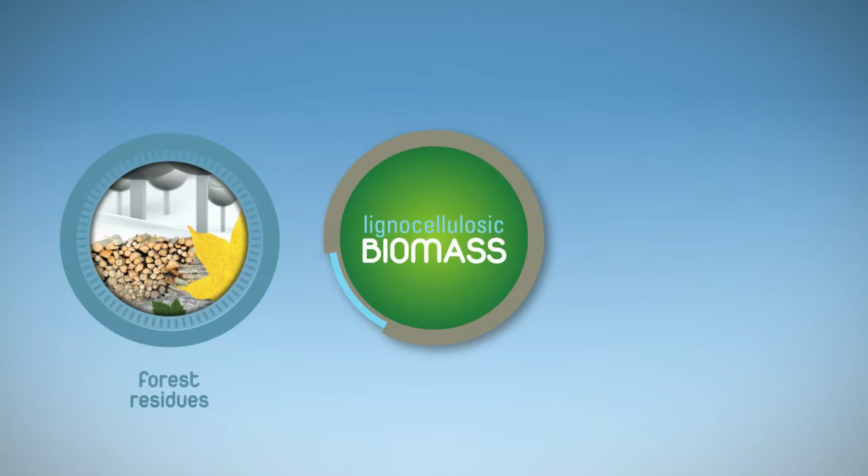These biofuels, which are intended for automobiles and aeronautics, come from the transformation of lignocellulosic biomass, such as forestry byproducts, straw, or dedicated cultures. For their development, the BioTFuel partners will validate the technical and economic feasibility of innovative production technologies in 2 pilot plants.

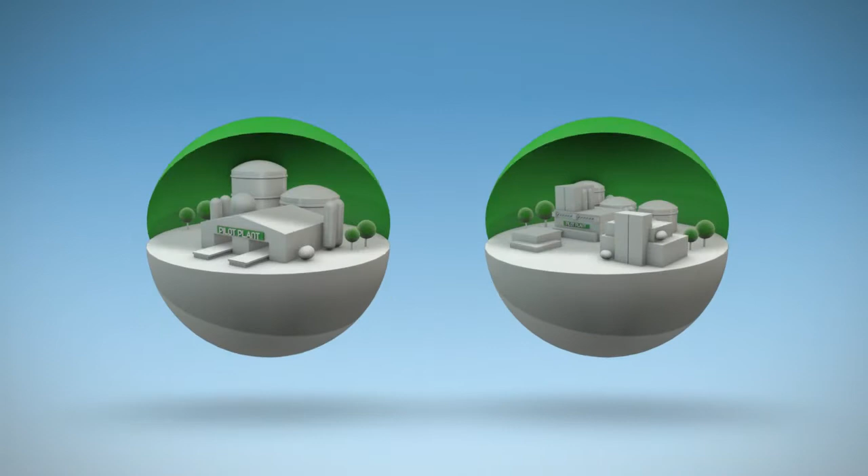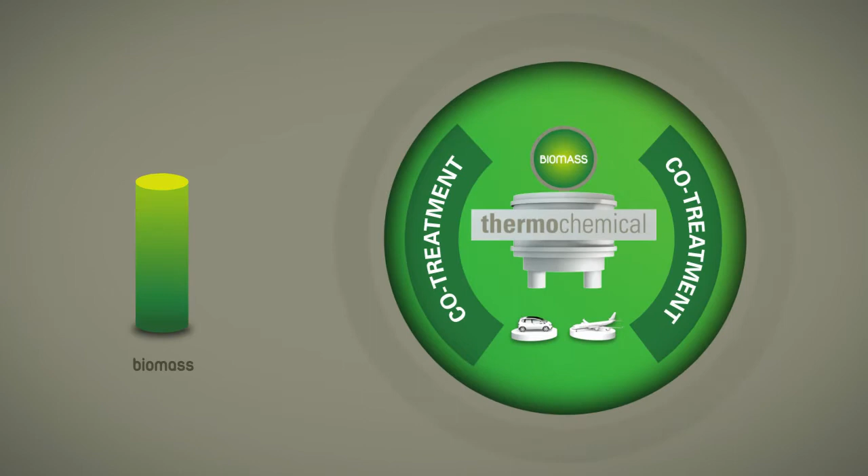BioTFuel will use thermochemical processes that transform biomass into biodiesel and biokerosene. BioTFuel has opted for flexibility by adopting the innovative co-treatment concept, which makes it possible to combine biomass with fossil charges. Co-treatment thus ensures a constant supply of the plants, while biomass production is undergoing seasonal fluctuations.

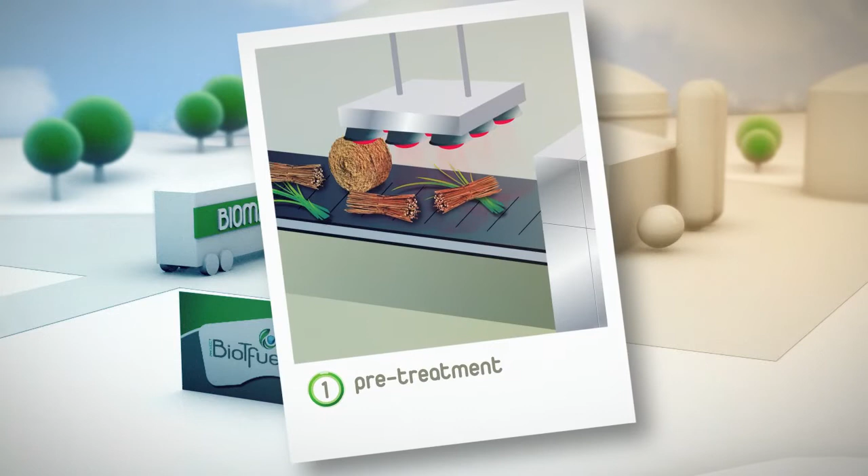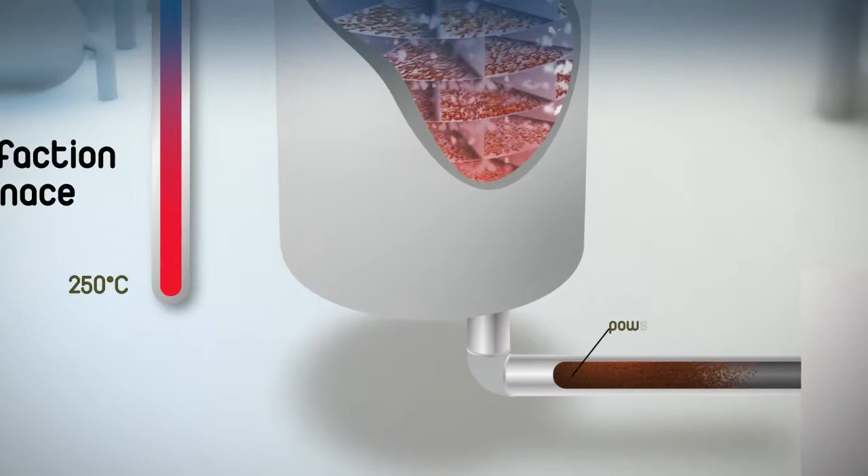The BioTFuel production process consists of 4 stages. Everything begins with the pre-treatment. During this first stage, the biomass is dried, crushed, and then preconditioned by torrefaction. The final crushing phase of this treatment makes it possible to obtain a powder with the requisite characteristics for optimal injection into a gasifier. The torrefaction takes place at Venette, near Compiègne, while the subsequent process steps are performed at Dunkirk.

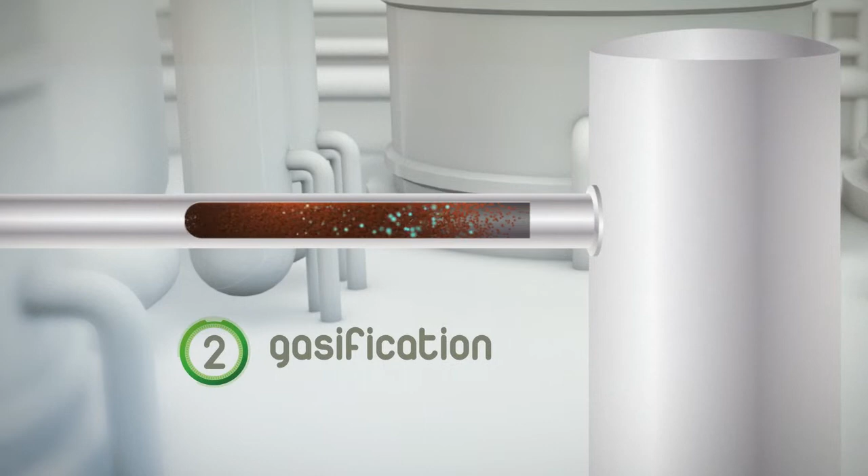The second stage is gasification. The torrefied solid matter is transported to a second site, where it is heated to a very high temperature in the presence of oxygen in an entrained flow gasifier, and thereby transformed into synthesis gas.

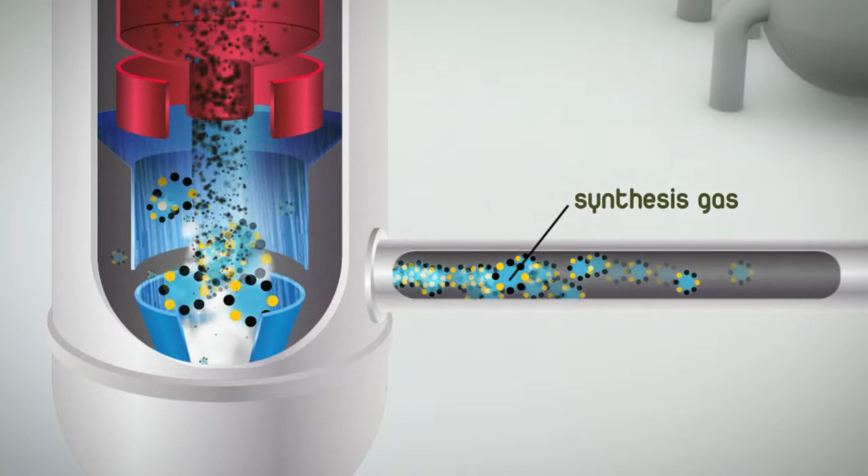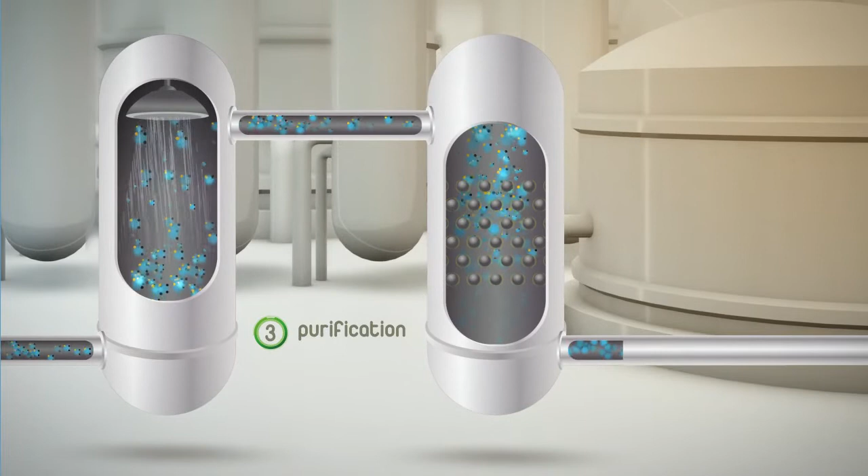This synthesis gas must have a high degree of purity so that it can be transformed into liquid fuel. The purification, which is the third stage of the process, consists in particular of washing processes using solvents and catalysts.

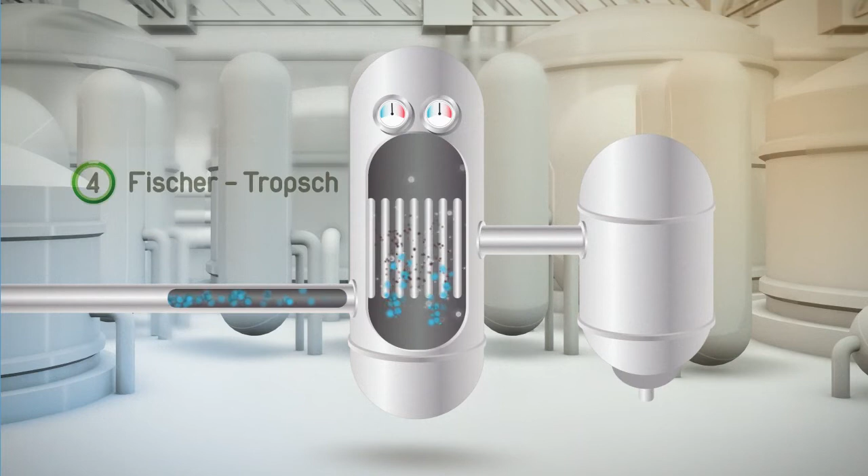The last phase is the final conversion by the so-called Fischer-Tropsch synthesis. This catalytic operation converts the purified synthesis gas into a liquid hydrocarbon mixture.

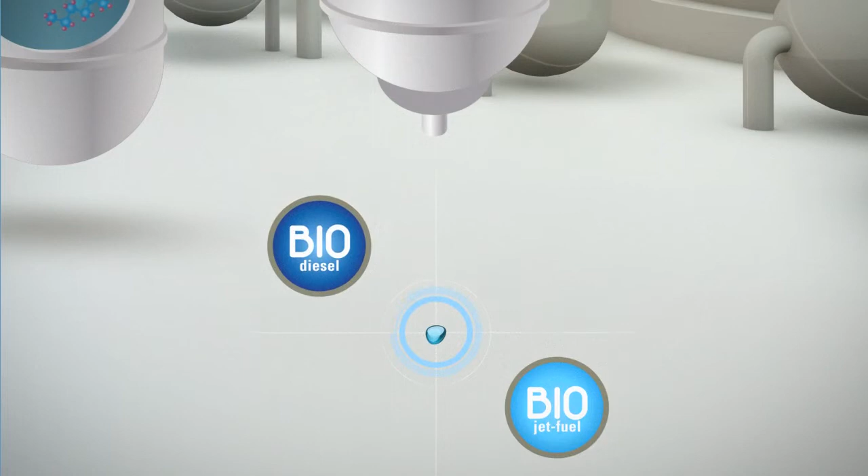The combination of these processes makes it possible to produce biodiesel and biokerosene of high environmental quality, which in particular permits a substantial reduction of CO2 emissions.

BioTFuel will make it possible to develop and validate a technology for the production of biofuels that can be used alone or mixed in any type of diesel or jet engine. This technology, which can be sold all over the world, will come to market by the year 2020.

With its large-scale demonstration facility, BioTFuel will contribute to the development of the energies of the future by meeting the environmental challenges of the 21st century.